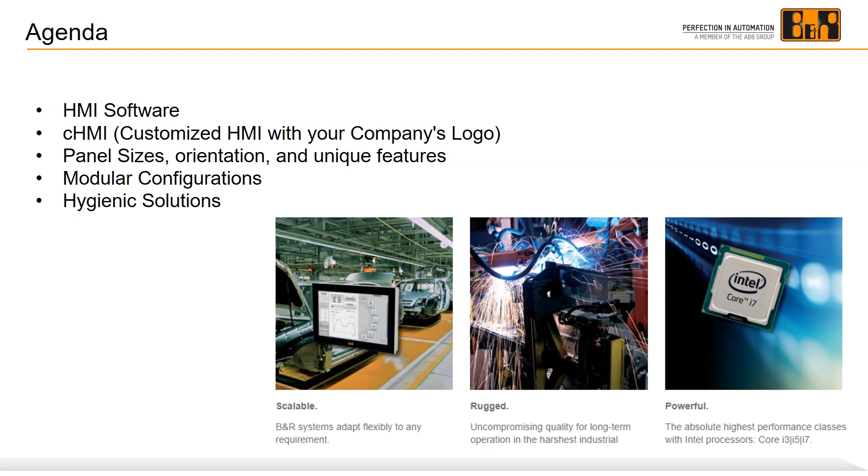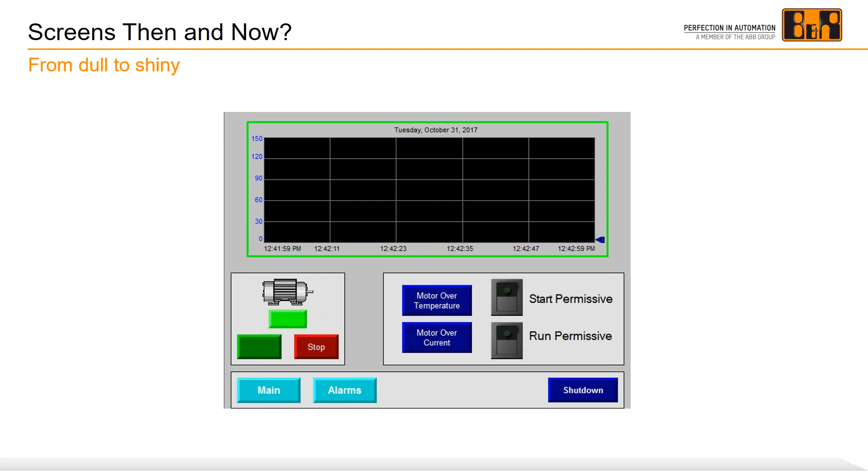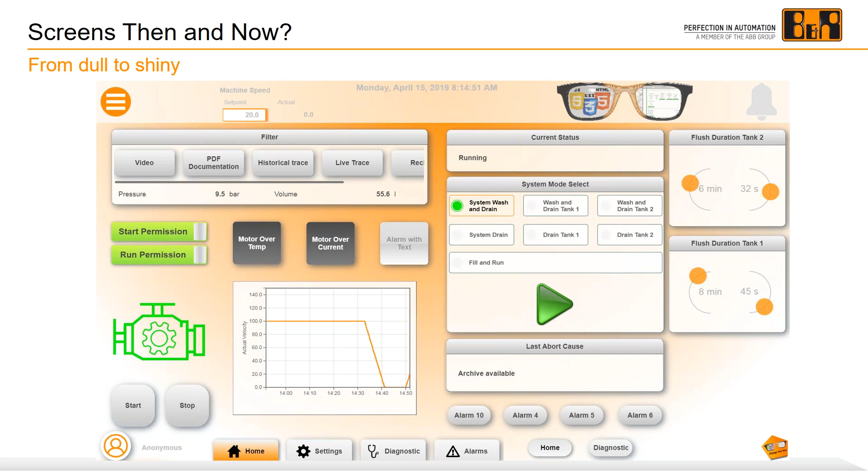So the last example was a great illustration of what is possible, but not everyone has the time to reinvent their screens from ground level. So how can you take smaller bites at bringing your next HMI development to market? Well, we have a great path forward here that helps limit the risk of a full overhaul, and we call it change your view.

So let's say you added the hardware and are now looking for that long overdue HMI overhaul, but you realize that there are still HMI limitations offered by that same vendor you were using. What could you do then?

Well, this is where we really start to have an impact with your user experience. By adding on the mapp View software within Automation Studio, we can easily connect to that same PLC vendor over EtherNet/IP and map the variables in the PLC code over to our environment. Once you have those variables mapped, you can start building your screens with stunning colors, graphics, and widgets.

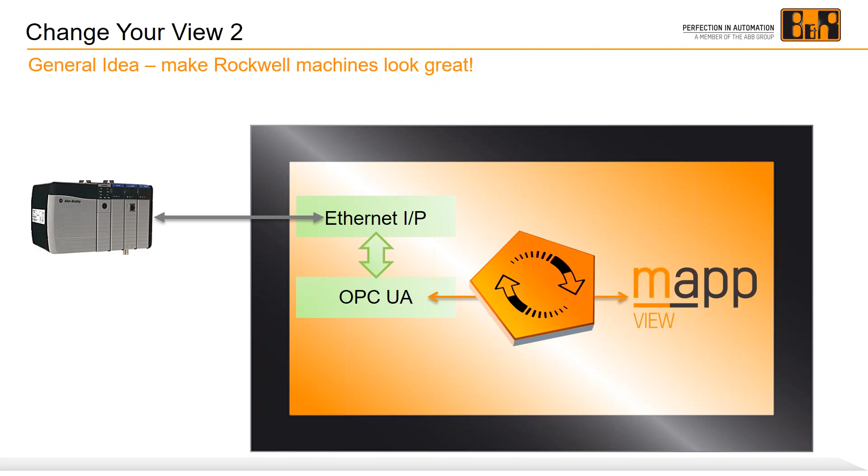The feature list is extremely long, but I'm sure you've had ideas or requests to embed PDF documentation on the screen or provide a how-to video for maintenance or machine fault recovery. Multi-touch functionality has been growing in demand and really enhances the user experience. And we all know with the current pandemic that remote connectivity is needed now more than ever.

So again, all of this is possible and works as a third-party solution to an existing controller.

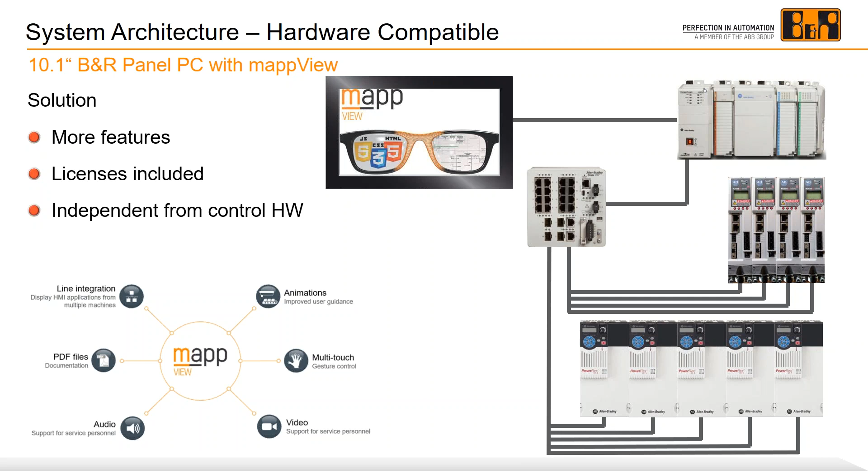Prior to becoming a partner with B&R, we had never really given much thought to branded HMI panels other than the brand that comes on the automation supplier. I'm sure most machine builders view it the same way and just find a way to put a label on the control panel away from the screen.

Now that we've had this HMI solution, it has led to many different conversations. The Rockwells and the Siemens didn't develop that machine. You guys did. So it only makes sense to maintain that brand awareness every time your customer uses the screen.

This solution takes a bit of thought to really grasp the impact it can have on your equipment and your customer. How you design your solution can tell a story about your company, and it can also bring unimaginable value to the customer experience with your equipment.

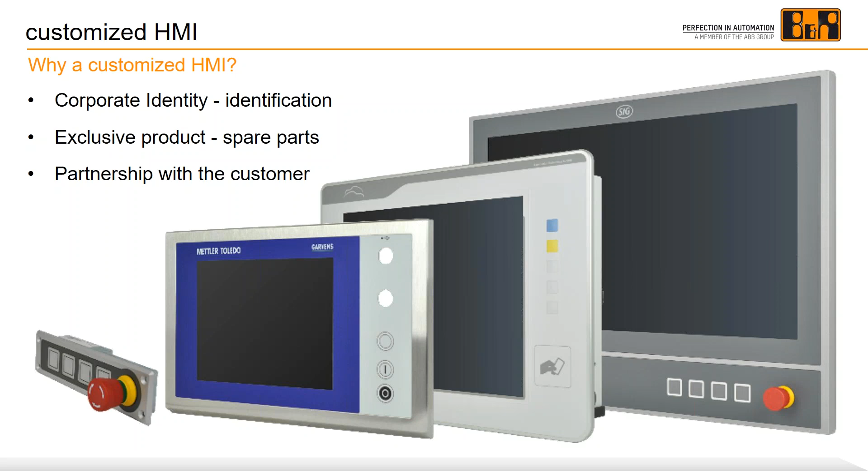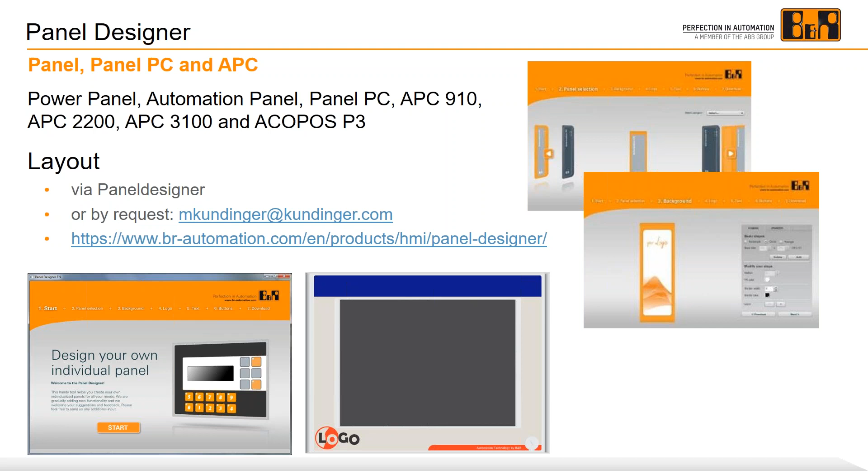Many of the customers that start out with basic name branding eventually move on to more elaborate customizations like you see here. Adding buttons, RFID readers, key switches, etc. are routine.

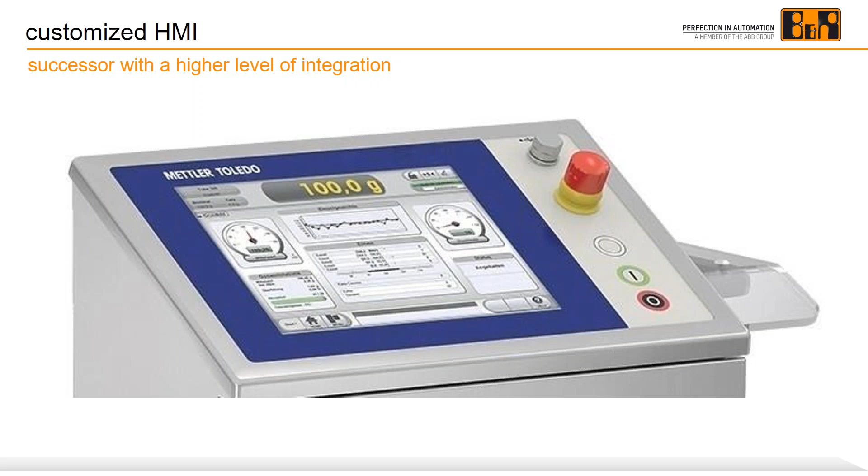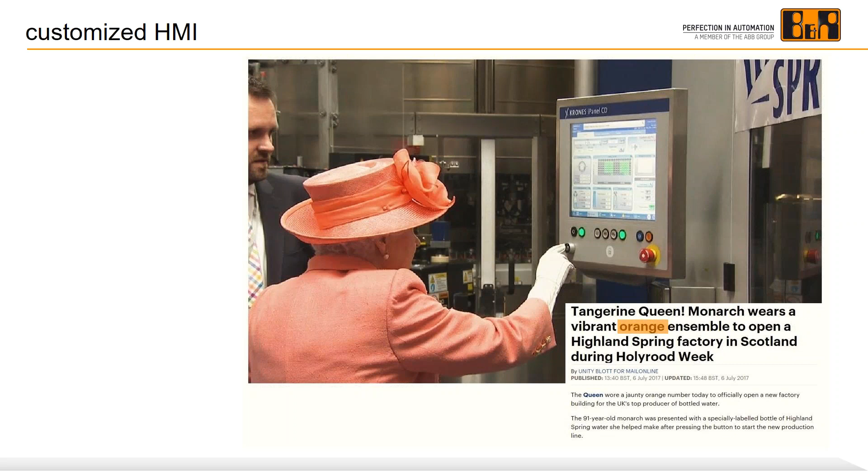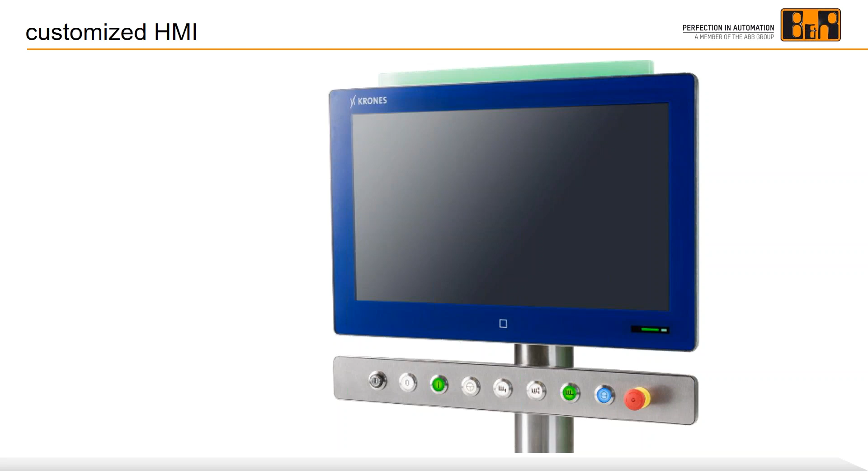Here's another great depiction of the design possibilities. Again, this is referencing B&R customer Krones. This also gives you a teaser to our swing arm mount and hygienic capabilities. This screen was developed for wash down environment and for swing arm mount.

Again, just another hygienic version that is integrated into a base console.

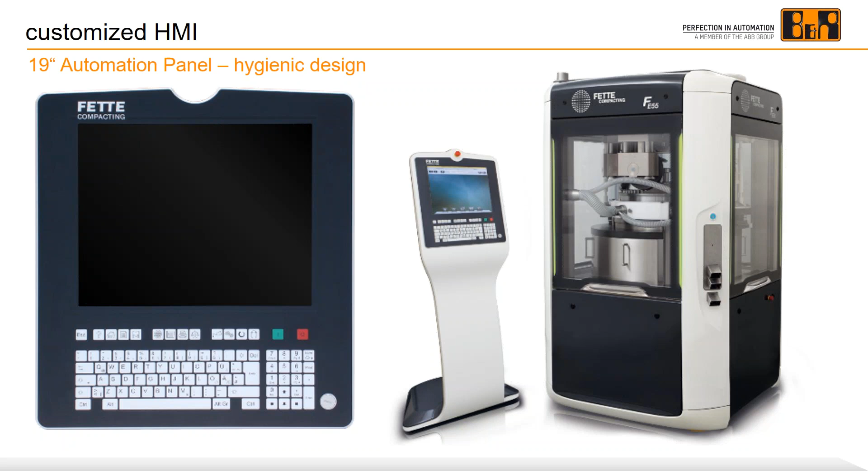Finally, we have a representation of a standard screen that also shows a variety of RFID options. Also pictured is a new patented feature we call a hygienic rotary wheel. This allows us to remove the physical device that otherwise would not be suitable for hygienic areas.

Simply put, the glass areas with the designs in them are machined in a way to provide the user a smooth texture for operating that area of the screen. So now I'll pass it back over to Tyler to cover the system sizes and options.

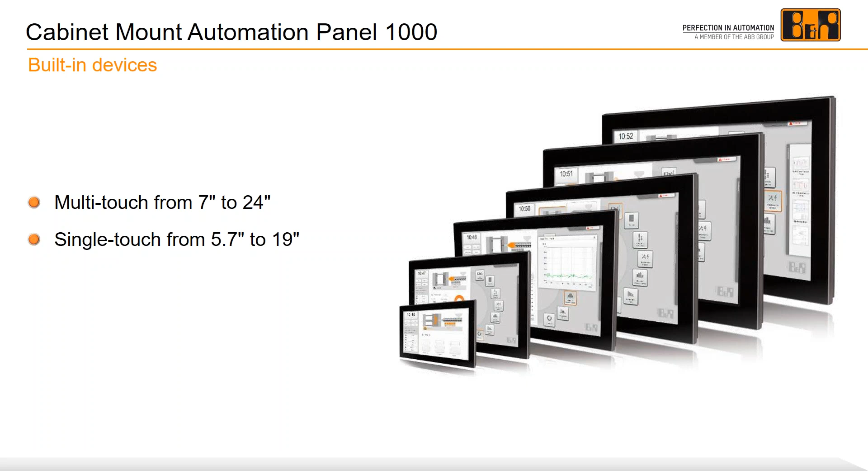The modularity of the Automation Panel 1000 has 3 main advantages. The first is that it's easy to update to new technologies without having to change the mechanical dimensions or the part number of the HMI you're using. There are just 4 screws in the back of the panel PC.

If years down the line you need more performance, have to update to a newer operating system, or load your latest application software, you can easily upgrade the PC hardware without having to update the HMI in the field. This is also the case if you have to perform service work on the PC or the HMI. If someone puts a hammer through the HMI, you don't have to replace the entire device, and this results in less downtime and simpler maintenance.

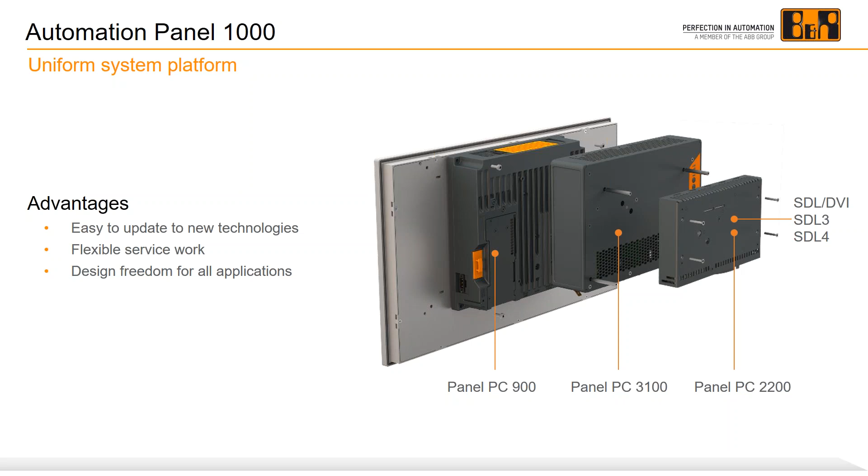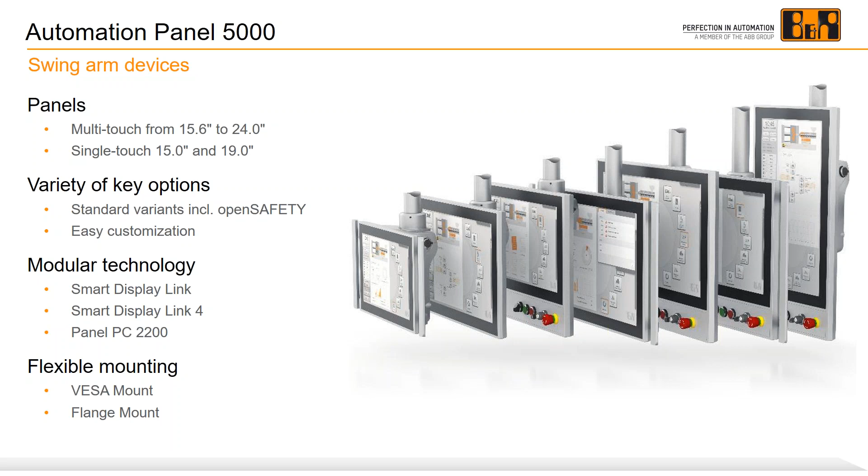The Automation Panel 5000 is our swing arm mounted HMI and panel PC. It's also available with single touch or multi-touch interface, and you can customize this product with a batch size 1 requirement. So this pretty much means there's no minimum yearly commitments in order to have a customized HMI. The Automation Panel 5000 can be used as a swing arm mount HMI or just as a panel PC 2200.

Because of the spacing and the mounting unit, we couldn't put, say, a panel PC 900 here because it would be too large to fit beneath this mounting unit. This panel is available IP65 rated, and it can be mounted from the top or from the bottom, so there's a lot of design flexibility. If you're retrofitting old systems or designing new equipment, there's a lot of flexibility in terms of how you mount this hardware.

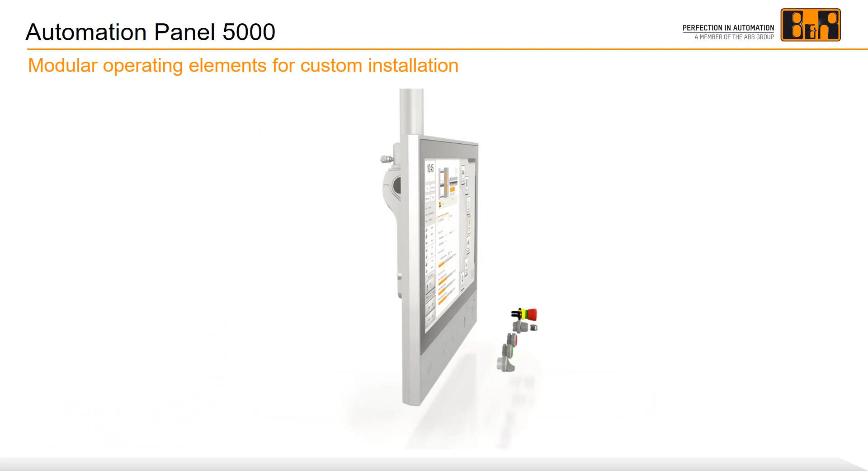The option for integrated push buttons in the HMI also offers a lot of value. It can help eliminate an electrical enclosure, clean up the wiring, and reduce the overall cost of the system. The best thing about these buttons is that you can access them via an OPC UA network, which makes it really easy to collect data and integrate those buttons into a third-party system.

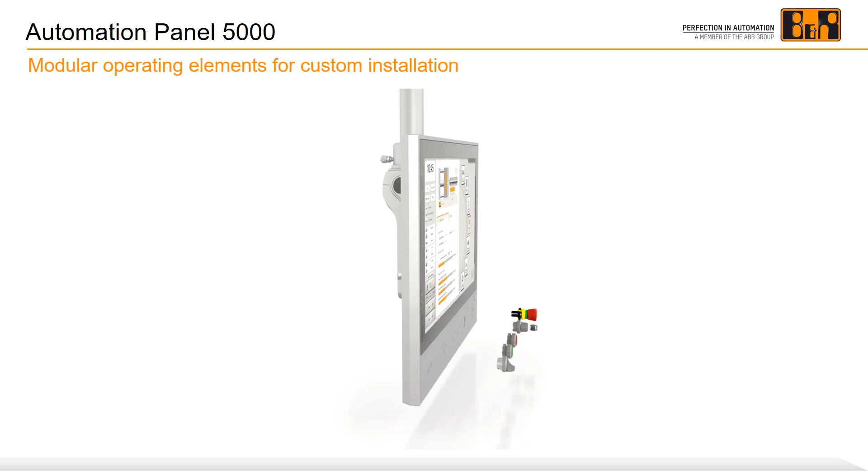If you're not familiar with OPC UA, it's a vendor-independent network for sharing data between different controls vendors and different levels within the plant. For example, it's really common for a machine to communicate OPC UA to an MES or a SCADA system that's at a higher level within the plant.

As mentioned earlier, in some cases it may not be possible or desired to have the PC integrated with the HMI. In this case, B&R has created a technology called Smart Display Link, or SDL. SDL allows us to pass the display, touchscreen, LEDs, keys, and USB data between the PC and HMI over a single cable with a DVI connector on it. SDL can be extended up to 40 meters between the PC and HMI, and it can work with any operating system.

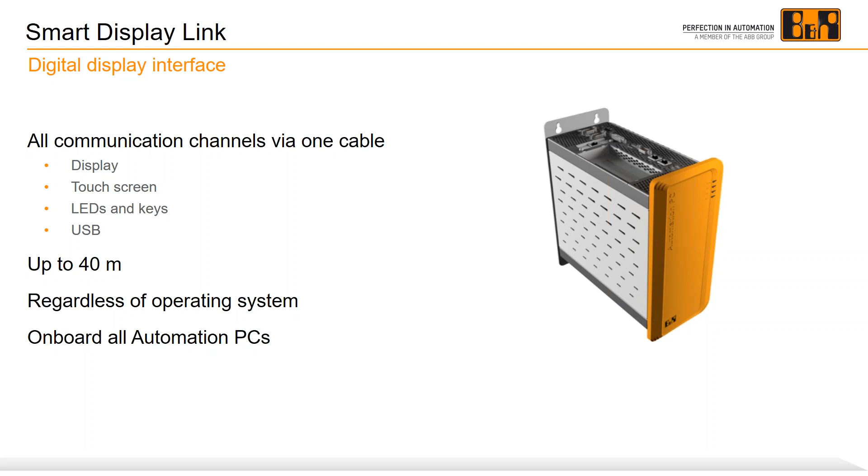In some cases you have to go further than 40 meters, or you don't want to use a custom cable. B&R also has SDL4, and this is a standard Cat7 cable. It has all the same benefits as standard SDL, only you can go up to 100 meters.

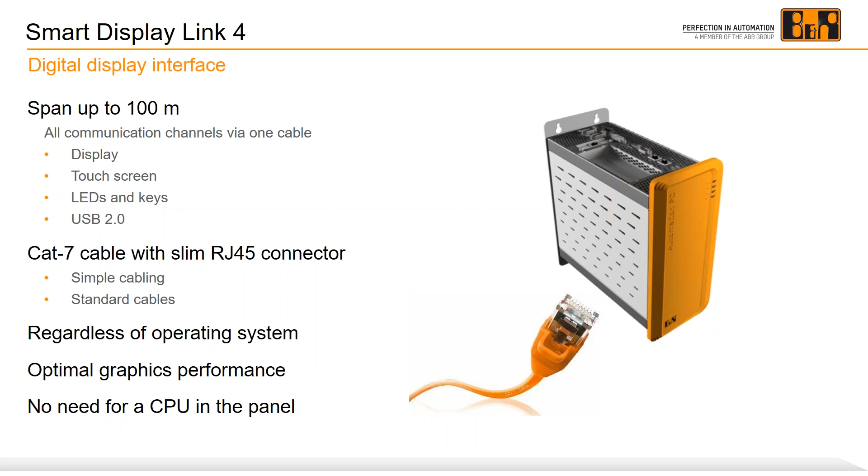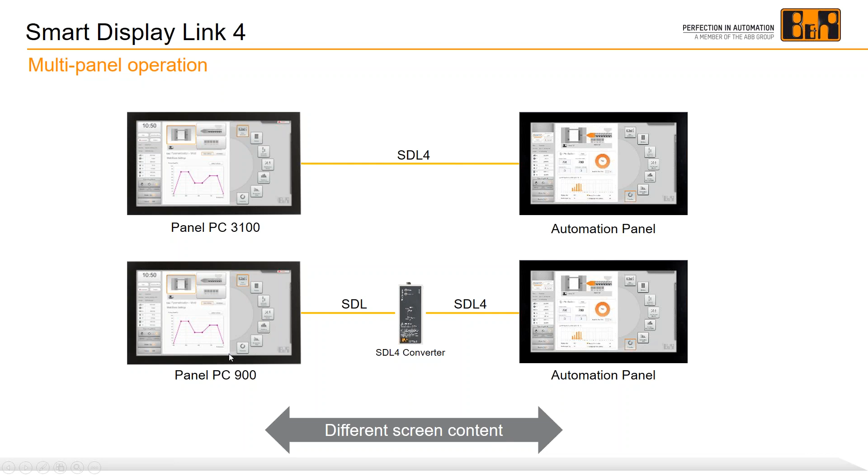In this example here, we're showing how you can have a panel PC from B&R that has an SDL transmitter on it to extend your desktop to have multiple displays. You can also have an SDL4 converter box here. So if we really needed to get further than 100 meters, up to say 140 meters, this is also possible. And there's different screen content on each of these displays, so they don't have to show the same exact thing.

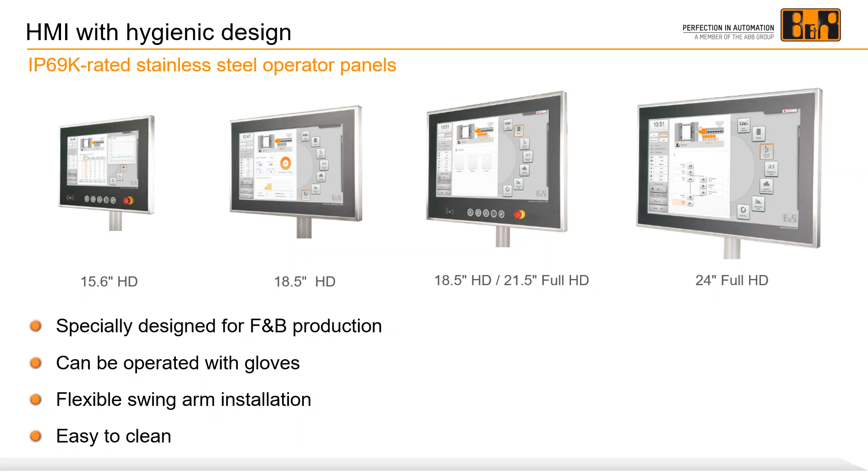We also offer a variety of different swing arm mounted HMIs designed specifically to be used in the food and beverage and pharmaceutical industries. The stainless steel IP69K rated HMIs can be operated with gloves, and it's easy to clean since it has no dust collecting edges. It's also built with shatterproof glass, so that if you're in the food and beverage industry, if something happens, there won't be any glass splinters that get into the product.

We also use illuminated ring keys instead of standard push buttons like we had on the AP5000. Each one of these white rings here will light up a different color and also acts as a push button to the system. And this whole system can be high pressure wash down.

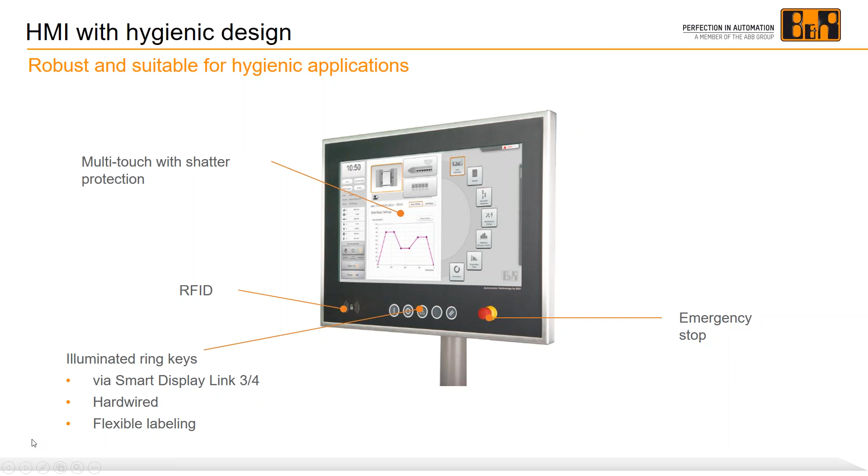Of course, like the other product families, we also have IP69K rated stainless steel panels that can be cabinet mounted, and those are available from 7 to 15 inches. They also have integrated RFID for logging in an operator and tracking what changes are made in the system.

So lastly, I just want to touch on the 3 different PC families and the performance that the different families come in at. The lower end panel PC from B&R is the panel PC 2200. It's using the Intel Atom processors, available with 1.3 to 1.6 gigahertz, either a dual core or a quad core processor.

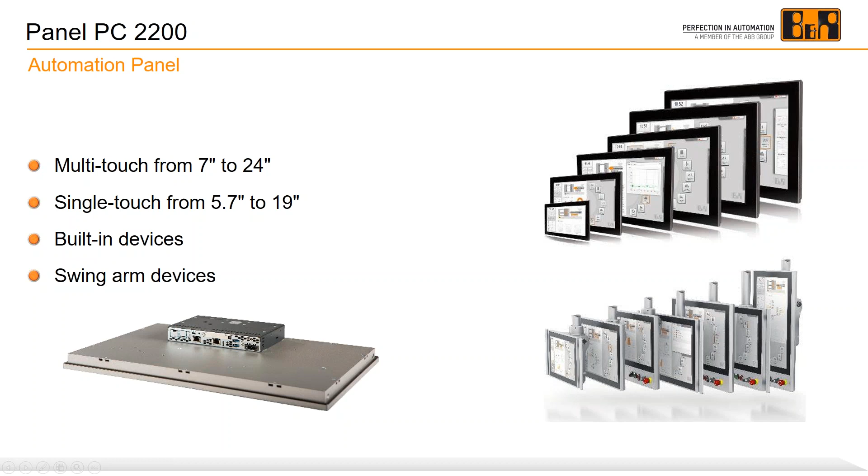The panel PC 2200 can be used with any of the B&R HMIs available. So it doesn't matter if it's single touch, multi-touch, cabinet mount, or swing arm mount, the panel PC 2200 works with every single display.

The panel PC 3100 is our newest PC family. It's based on the 7th generation i-series processors. You can have up to 32 gigs of RAM in this panel PC, and it has 2 CFast card slots, which is kind of unique on the market and makes it easy to set up one CFast card to run the operating system and the other to store data, making maintenance a lot easier. All panel PC 3100s are also fanless.

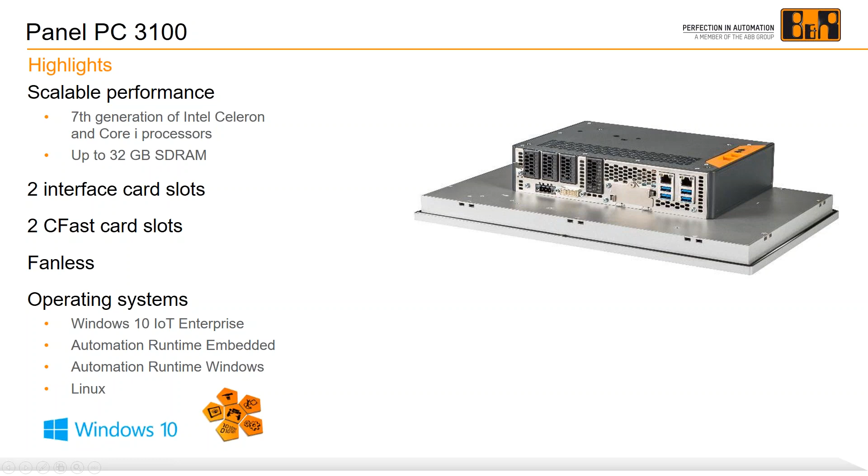There's an option for integrated UPS in the panel PC 3100 and the panel PC 900. That allows, in the case of a power failure, the PC to have enough time to shut down so the operating system and other software don't become corrupt.

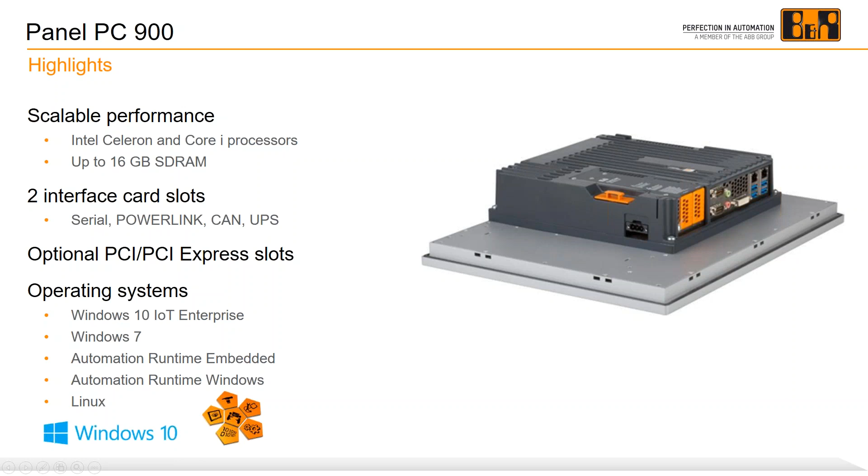Lastly is the panel PC 900. There are really 2 main reasons why you'd use it. One is you have to have a PCI interface or a PCI Express slot on the computer. The other is you have a large amount of storage required to store locally. We can put up to 1 terabyte drives in this, and you can do multiple drives. So this would really be a computer for when you have a lot of data in your system you want to store.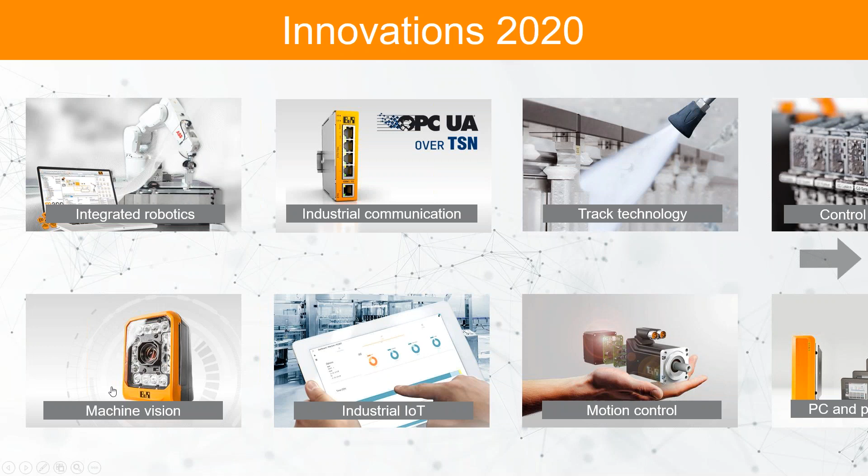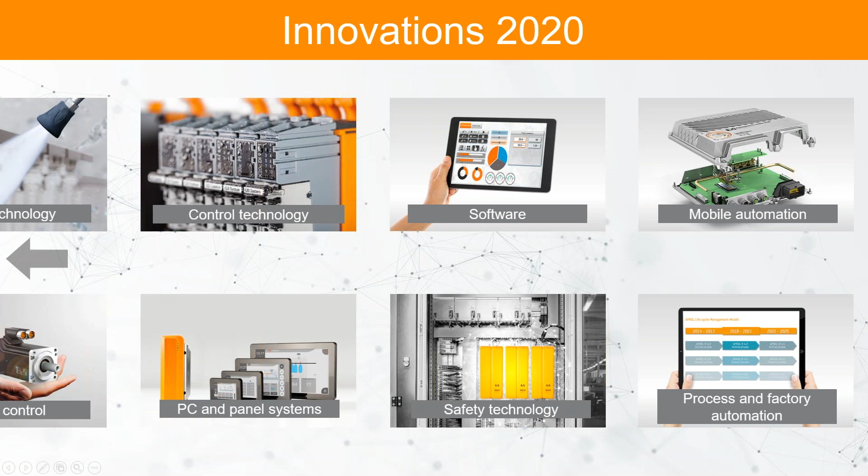So go ahead, keep sending those questions. We've got a few minutes here, and I've got a couple that have come in. So first one here, Tyler, what is the typical product life cycle for our HMIs?

I think we covered this, but it's still a good one: what is the minimum order requirement for your HMI? The minimum is 1, and it just depends on what type of customization people want. In some cases, if they're making a lot of mechanical changes, there could be a 50-piece minimum requirement. But for the standard panels we talked about today, especially the automation panel 5000, that's just a quantity of 1.

One person submitted this: you mentioned automation runtime, what is that? That's B&R's real-time operating system. It can be run on the industrial computer to do real-time control, so if you didn't want to put Windows there but wanted to use a high-performance computer as a PLC, essentially.